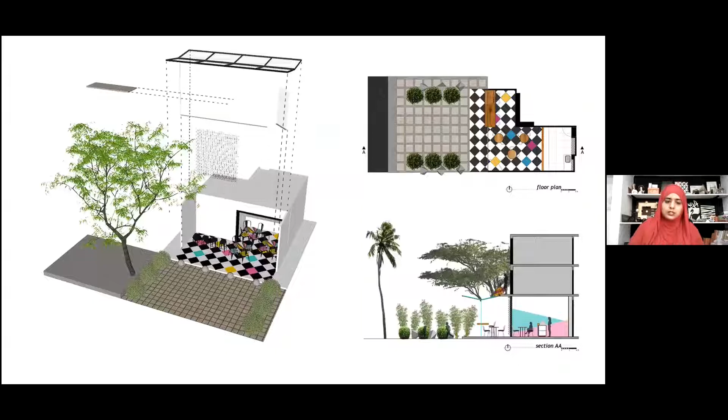And then there is this floating counter, another thing that we experimented with, which I'll be showing you later.

So this is the canopy that we created. They wanted to extend the exterior by about 5 feet, so the canopy is about 10 feet in width, and it slopes towards the center like a butterfly or like an open book.

And that's the process of getting it installed and fabricating it.

As I mentioned earlier, we wanted to reevaluate the role of an architect or designer in the project. We really expanded the scope of our work by also executing the design, because it was such a small project, and there were so many experimental things in it, we knew somebody else would not be able to take that risk and execute it. We not only expanded the scope of our work, but also the scope or footprint of the project.

We also designed the exterior and the landscaping. We painted the pipes on the left side, you can see, and we painted the rest of the building as well. This is the view from the balcony above.

This is on the ground floor, and the upper floor is just a storage space. So we climbed up, and the view from there is really interesting because half of it shows you the interior and half shows you the exterior.

So that's the view of the butterfly truss from the top. You'll also notice the sort of graphical nature of the interior design here, kind of black and white with stark pops of color.

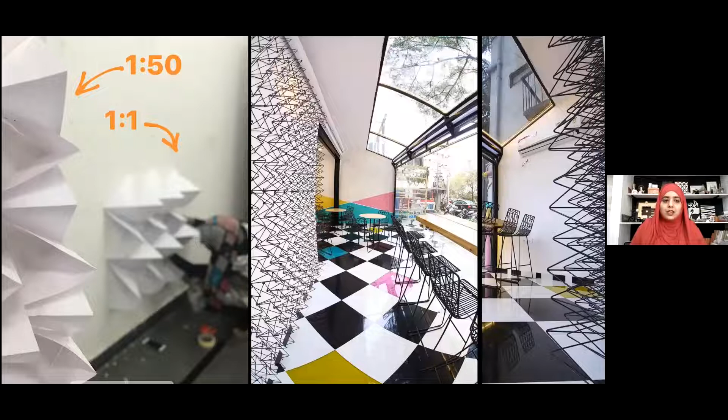We work with a lot of prototyping, as I had shown earlier. This is the feature wall that we did in metal. This is the prototyping process that we did at 1:50 and 1:1 full scale prototyping, and then translated that into metal. So every time we design anything, instead of giving drawings, we like to give models - especially scaled models or full scale models - because we see that the fabricators understand the 3D models much better than they understand the drawings, and they're able to translate it easily.

That's another view of the space from the inside. You can see that we wanted to give it a kind of European bistro sort of look, even on the outside. So you have the greenery on the outside, the shrubs, and little bollards that we designed.

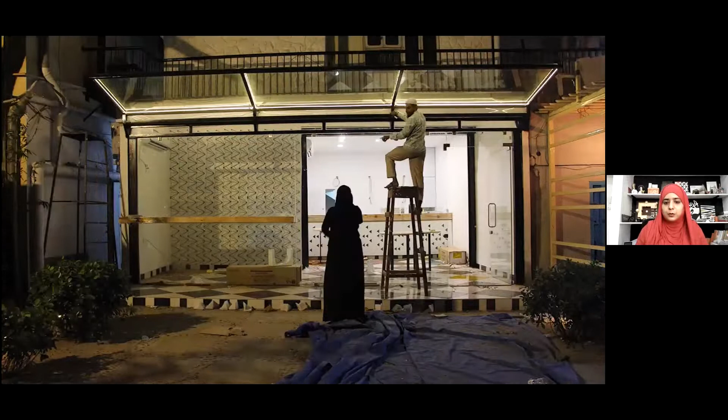This is the execution process. You can see the floating counter there being installed, and then of course light plays a very important role in any project, especially in interior design. That's our team at the moment, at that particular time, who worked on this project together.

I love this picture because you can see it kind of cuts through the floating counter, which really exposes the way it floats, and also shows you the butterfly truss. It's really an interesting image. And that's the view from outside.

So we have layers of light - even exterior lighting is something that we did, and we also lit the facade of the building. A lot of the light falling into the building comes through the glass. Instead of having all the lighting indoors, we decided to keep some of the lighting outdoors, and you have the borrowed light coming from outside into the building because there is glass there. So we didn't have to have a ceiling or any visible light fixtures - the light would just come from outside, just like sunlight comes through the glass. Also, these geometrical sort of geode-type bollards you can see have light underneath as well, so you have this diffused light coming out from there.

This project has been featured in multiple magazines and online portals, including Design Detail magazine and Inside Outside, and it has also won in 2019 - it was the platinum winner of the Berger Architecture Ideas 5.0 competition by the Festival of Architecture and Interior Design, in the restaurant interiors category.

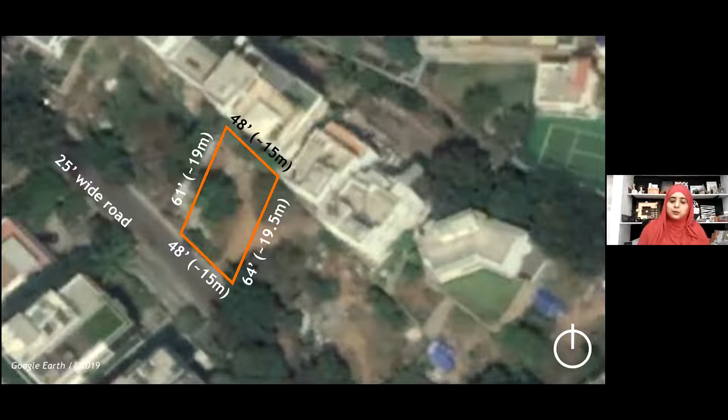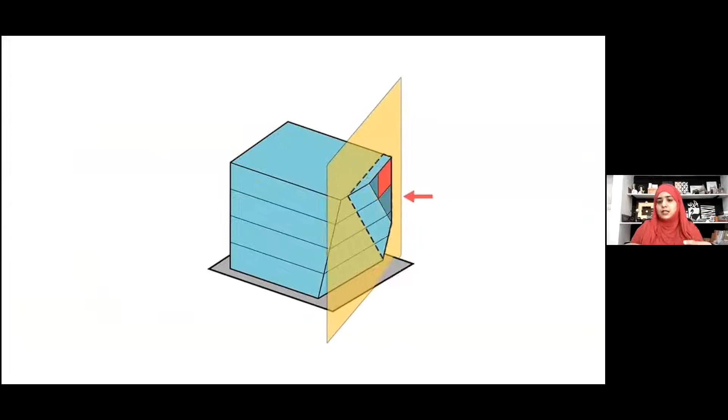So the plot is kind of a parallelogram, and this is another way that we do prototyping, where we use a lot of found objects - this one was just stacking of stapler pins, as you can see. The reason why we did that was because the site was a parallelogram, so we had to figure out how to cover the most part of the site. So we started to slice the building in that way, and then we were able to create a much bigger footprint.

So the lowest floor has the smallest footprint, and there are overhangs of 3 feet at every level, and also a stepped facade - every floor is bigger than the floor beneath it. So the biggest floor is on the top and the smallest floor is on the bottom - kind of a flip of the way it usually is.

So these are some of our explorations, and that's the final prototype of the way the building would be. Because of that parallelogram shape, we had two opposite acute angles, and so we had to create a stepped kind of floor plan.

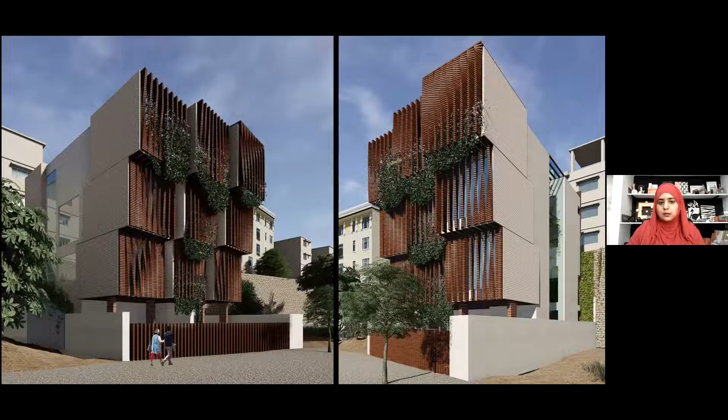And at every level, it increases by 3 feet in the overhang, with a 12-foot cantilever at the end. So that's the design of the facade. We also did the interiors, but I'm going to focus on the facade itself.

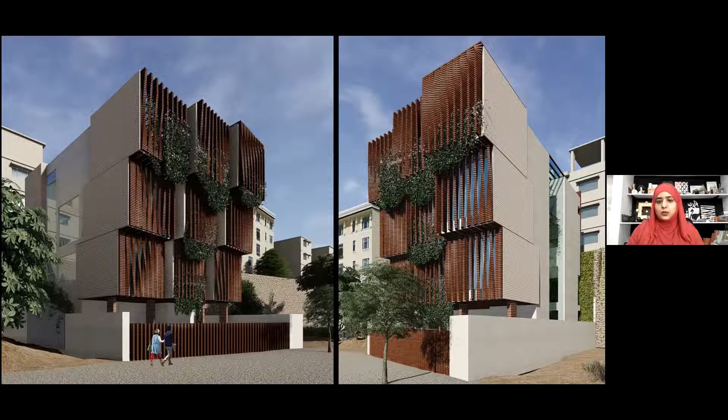The reason I'm showing this is because it's a glass facade, floor to ceiling glass windows, but we created a layer over it - a layer of louvers rotated at different angles, allowing a certain quantity of light to come in while also providing privacy. So it doesn't have to be a purely glass facade, it can also be layered in many ways.

This is a generative, parametrically designed facade that is data driven. We identified the programmatic makeup of the spaces within each of these grid spaces. So if you have a pool or green space, the percentage of openings is more; if you have a bedroom or dressing room, the percentage of openings is less. This percentage depends on the angle of rotation of the louvers over the facade.

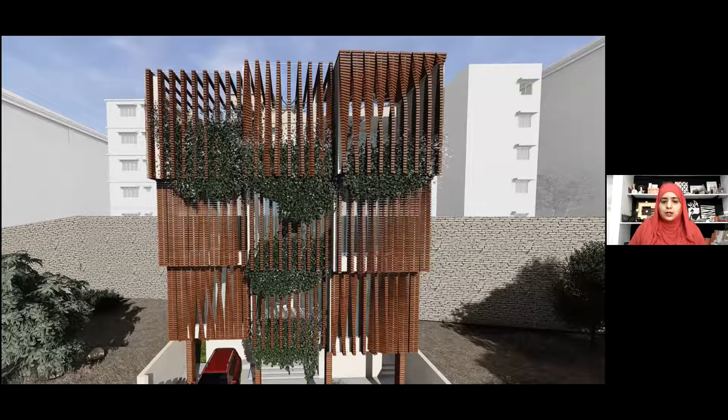It's also a dynamic facade - some of these louvers are openable and closable. It's almost like a smart facade that can be operated using your phone. Depending on the time of day, when you want more privacy or more light, you can open and close these louvers as you wish. So that's how it looks.

These are UPVC louvers. All of the floors are completely glass, but they're covered with this layer so that it provides shade and privacy. This is now under construction.

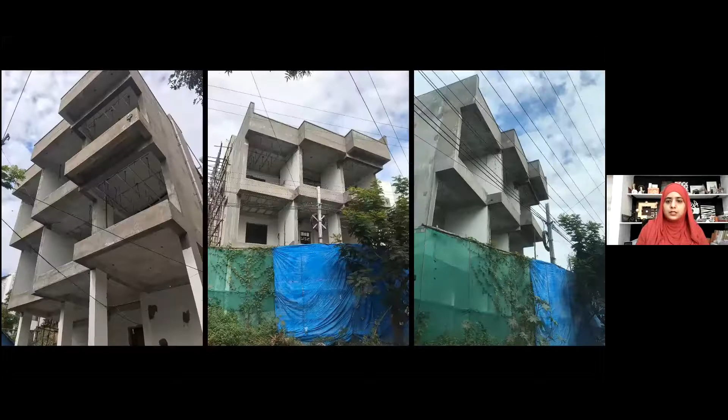So we started something called Build-A-Ware. As I said, Design-Aware gives birth to so many other initiatives. Build-A-Ware is one where we decided to take the construction, execution, and fabrication processes involved in our experimental projects and take control over those processes so we can deliver a better quality output. It's really difficult for other execution teams to understand some of our design experiments, but we understand them and we're able to execute them as well.

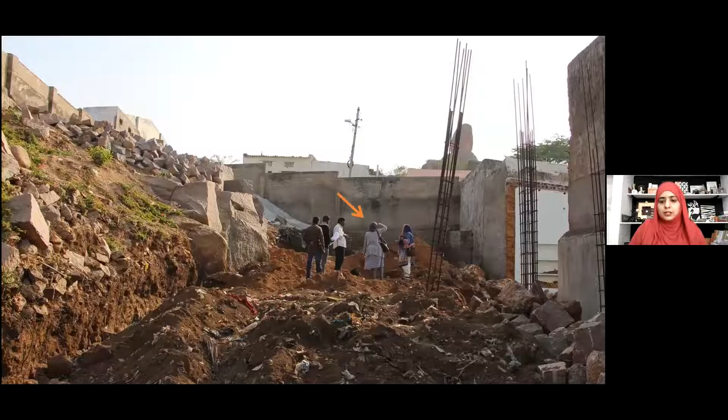This is the site we were given, that's me on site. We were asked to design a charity school for children from disadvantaged backgrounds, and the site was located inside the Golconda Fort. This site is really hilly, a very difficult, highly contoured terrain. On the left side there's a cliff that divides the site into two parts, and on the upper side you have a lot of existing trees.

Whenever we do any design, before we start the process, we outline our principles that will govern the project. We can change details that have aesthetic consequence, but we don't change the principles guiding the project forward. In this project, our principles were to preserve the natural features of the site, including safeguarding the trees from being felled, and also the rock and the existing natural contour or terrain.

These trees are significant because before the school was built, a lot of students had an informal school run out of a small hall, so they used to sit outdoors under the trees and learn - our traditional Indian system of learning. Even though this is in a metropolitan city like Hyderabad, the children live in this area, on the top of the hill.

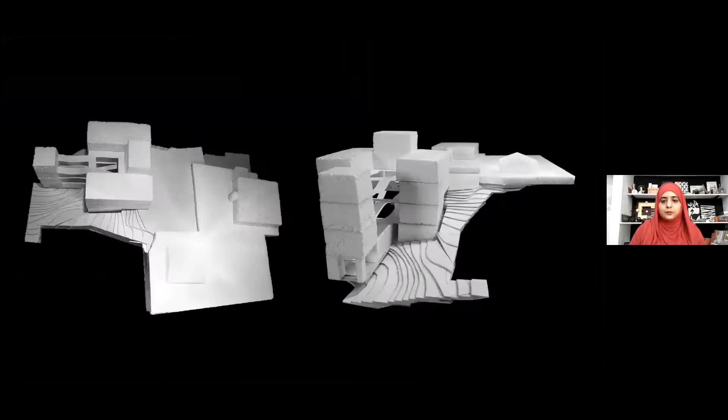They are used to climbing this rugged terrain and the rocks, which is really interesting to note. These are some of our explorations with the terrain.

When we started to excavate, we noticed there was a lot of rock that could not be determined before. Even through our extensive site surveys and geological surveys, we couldn't profile the rock in detail, so we had to design as we were constructing.

So the site itself really dictates the design. The building sort of seems to grow out of the site. It's a really tight, low rise, high density neighborhood context, and within that you have these row houses with shared walls, all courtyard houses.

So the ventilation has to be done from above. These are things we took into note when we were designing.

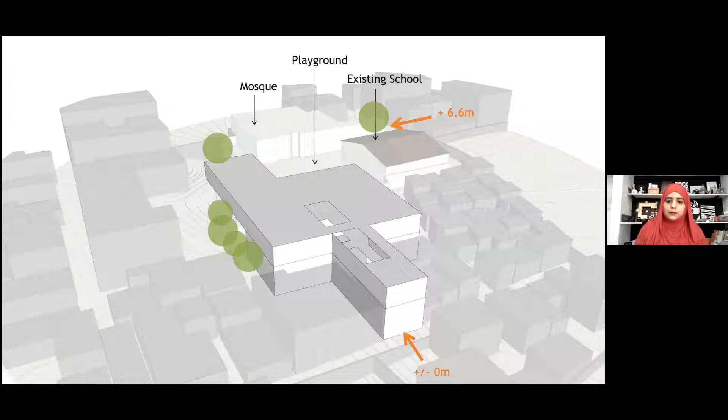Another thing is that because it's a hilly terrain, one entrance to the school is from, let's say, 0 level, and the other entrance is from the second floor, which is about 6.6 meters or 20 feet. So you can enter the school from below as well as from above. That's how the school situates itself in this very tight context.

One entrance from the left side you can see, and then you have one entrance from the top if you go winding around and climb up.

Even the playground was an existing open space. On the left side was that really hard terrain. The playground was part of a box of soil created by retaining walls, so it was a flat space. Then on the left side was the cliff.

We could very easily have built on the playground, but instead we decided to build on the more difficult part of the terrain because the playground is a really big asset. There's hardly any open space in this area, and most urban schools in Hyderabad don't have a playground—they have to use the street or block it up, or use the terrace. So the playground was really valuable to us.

Here you can see what's important to note is the skylight, so that's what I'll be focusing on. The skylight is a geometric skylight that we designed computationally, and it tops off the upper level. The floor plan sort of shrinks and grows in response to the rocks.

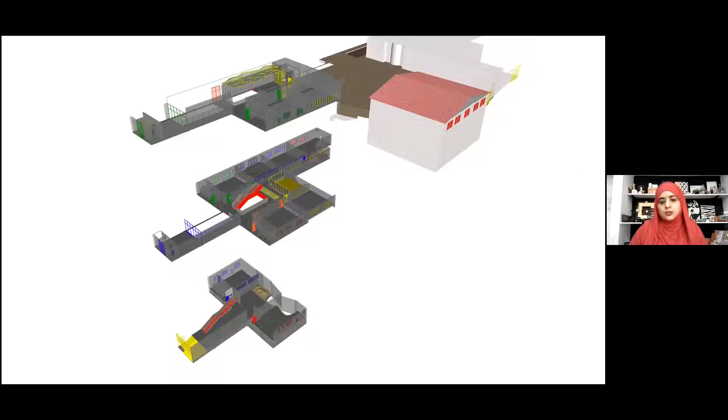That's how the floor plates are, and we call them lower ground, middle ground, and upper ground, because each level touches the ground at different parts. That's the cliff, and you can see that every level touches the ground.

We also took cues from the local context. Neighborhoods and houses in India are really brightly colored, self-designed and self-built. So we took all these colors into account when designing, and decided to use primary colors with orange, applied in a very controlled manner throughout the school. You can see pops of yellow, blue, green, orange, and red.

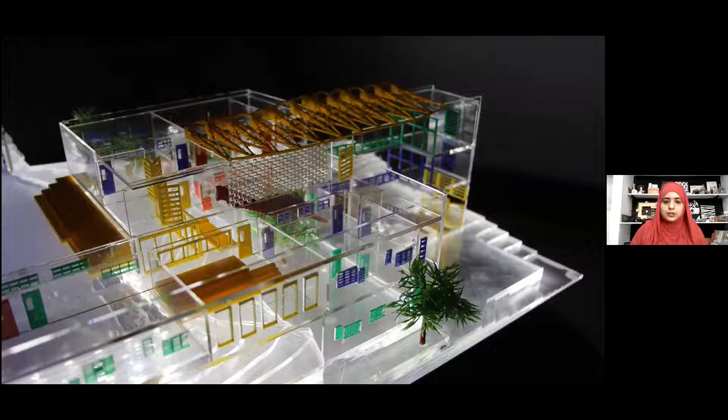Also this is a model that we did in acrylic, our favorite material—a combination of laser cutting and 3D printing. This is on display at the permanent exhibition in the Hebei Design Museum in China.

This is the facade. This is a green building project. It does not use too much glass, but uses it where necessary and where it really makes a difference. The entire school is a really low budget building because it's a charity school.

So we had to keep it not just low budget or low cost in its execution and design, but also low budget when it comes to maintenance. We have to think of the future life of the building as architects rather than only until the construction process. So the walls remain completely raw and unfinished because that brings down maintenance and you wouldn't have to keep painting them again. That also creates a really stark contrast between these colors and the cement walls.

You can see that the rock comes into the building—it's been taken into the building on the side of the cliff.

This is the staircase that cuts across all three levels, and then it goes up. You can see that there are skylights, so there are two atriums on either side. They almost remind us, especially this narrow space, of the courtyard house that used to exist here before. Light comes in from the top, and because we have shared walls with the neighboring houses, we had to create opportunities for ventilation from the top rather than from the sides, since we couldn't have any windows on either side.

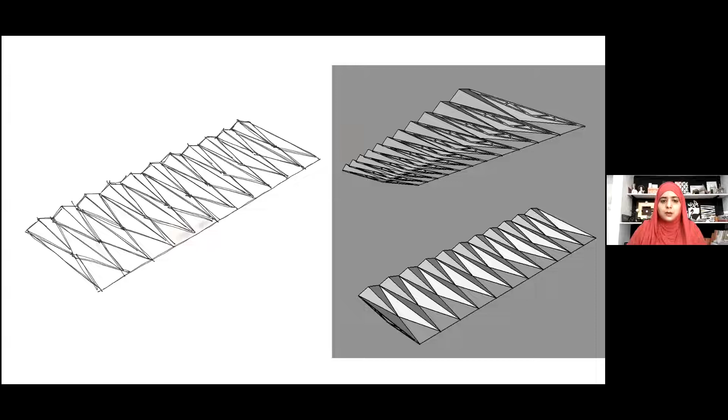This is our initial design process. We start with a little bit of sketching, but we very quickly go into prototyping. We did this model at 1:5 scale on the left side. One of our interns worked on this model of the skylight. The entire skylight is 80 feet long.

A lot of the design decision making and technical work happened on site while construction was going on. Even with this, we didn't have any formal drawings. We had our structural engineer there showing the fabricator what kind of truss was to be used. Instead of using real drawings, he just sketched it out and showed it. On the right side, you can see the prototype.

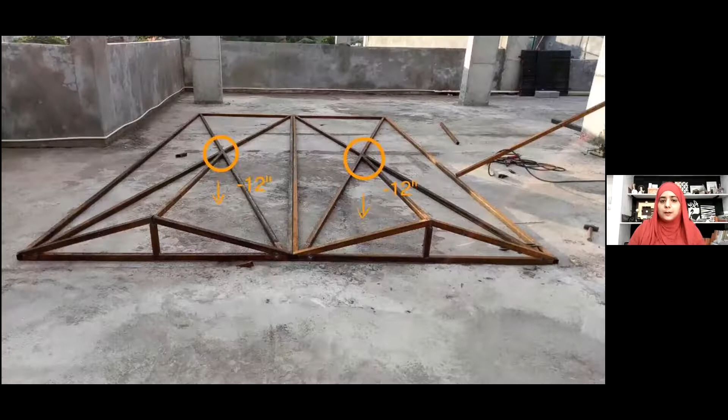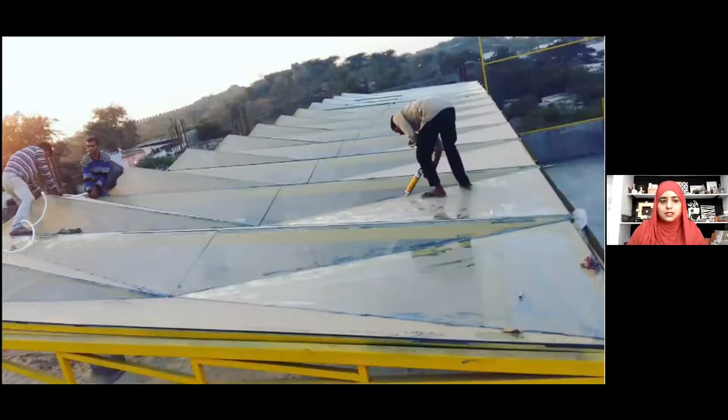The model was used, and the same model was taken as a reference for measurement and directly to fabricate this entire skylight. It's a repetitive, modular kind of skylight. This is the process, and this is the glass being fixed. For the glass, they had to create each pane, and there would be slight differences in the measurements because it was made by hand. All of the welding and metal work was done by hand.

They had to measure each section individually, and using MDF, they created the triangles in 1:1 scale as stencils. Then they outlined them onto the glass and cut it. So each glass pane might be slightly different in dimension because of human error.

That's the view from above. The reason we used this glass skylight, as I mentioned earlier, is that we could not have any windows on either side, since the building has shared walls. So the ventilation and the natural daylighting had to come from the top, from the center, and this illuminates all parts of the building.

You can see that we preserved the playground. There was an existing mosque there, so everything was pretty much kept, and the playground was preserved so that it forms the sort of lung space. There's another school on the other side as well, which is a private school, so there are quite a few schools in this area.

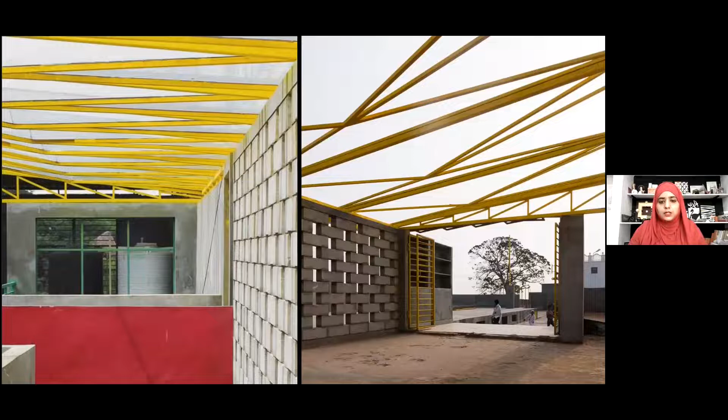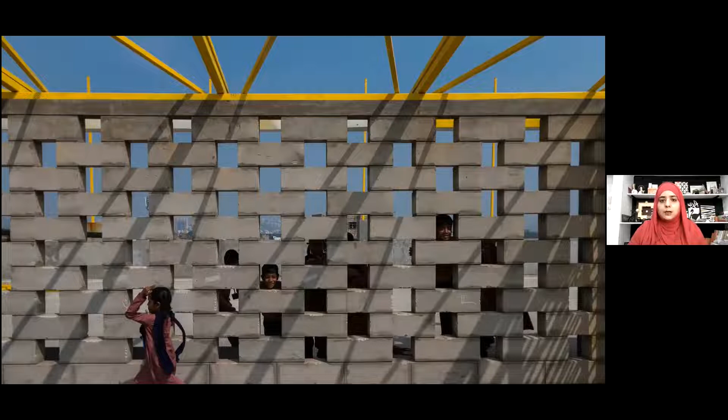This wall on the left side is a perforated wall, so there's cool air coming from there. The skylight doesn't really heat the space within. That's the perforated wall, and that's the skylight, different views of it. So this is the wall that brings in cool air from the north, and it's not a completely enclosed space.

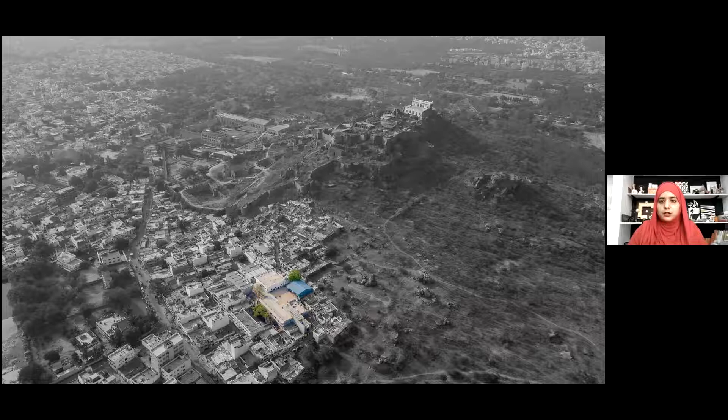It's a semi-open space. That's how it looks from above. You have this narrow space, and then a wider space, and the skylight connects both of those spaces on top. And that's how the school situates itself in the greater context of the Golconda fort.

This has been a really popular project in that we've had students of architecture and design, design enthusiasts, and architects from all over the country who used to visit the school almost on a monthly basis. We had a roster where we used to guide them around, and some of our interns used to take them around as well. So we had a lot of people coming for a case study or to visit the school, and it's kind of become a landmark for architecture students in this area.

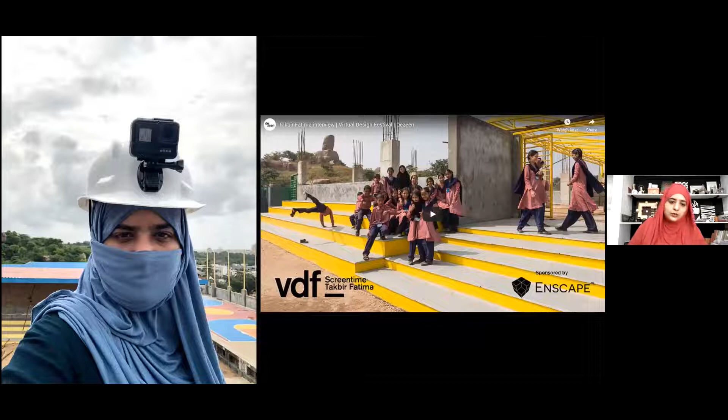It was also featured on TV a couple of times, but since 2020, of course, all that stopped. So we decided to share a remote walkthrough of the school. I just put a GoPro camera on my head and walked through the school.

So you'll be able to see that on the Virtual Design Festival by Dezeen. We were the only Indian firm to participate in the Virtual Design Festival, and that's there on YouTube. You can see the tour of the school remotely.

The school is also a green building, as I said. It's been awarded the Silver Rating by the Indian Green Building Council in 2018 because of the respect to the existing terrain and also the natural ventilation. I forgot to mention earlier that we have artificial lights everywhere, but they're never turned on, and a lot of times there are no bulbs because of all the daylight that's coming in.

And most recently, something that we're really proud of is that the school was published along with so many other works of architects that we admire in this book called the Rethink Design Guide, Architecture for a Post-Pandemic World, in the section on schools as a case study for how schools should be designed in the post-pandemic future. It's published by the Royal Institute of British Architects, and we continue to be associated with this project even till today.